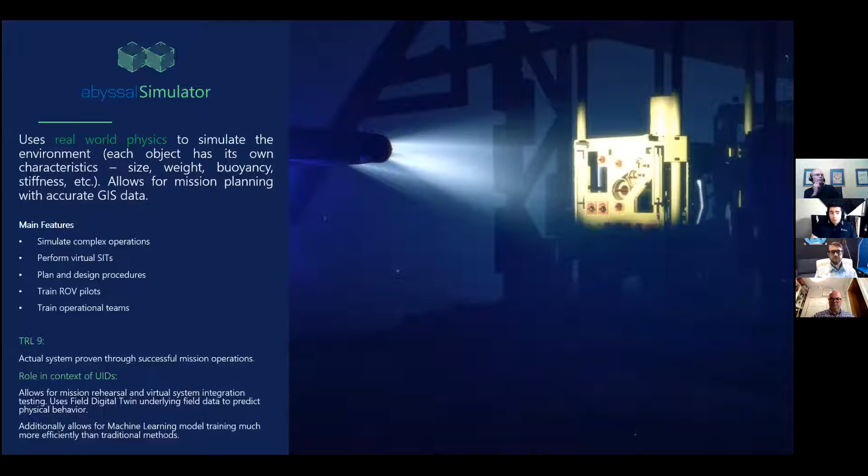Now that we have the data, we use a physics engine on top to simulate and perform different types of behavior analysis on subsea vehicles. The result from a simulation is a plan, and that plan is then executed.

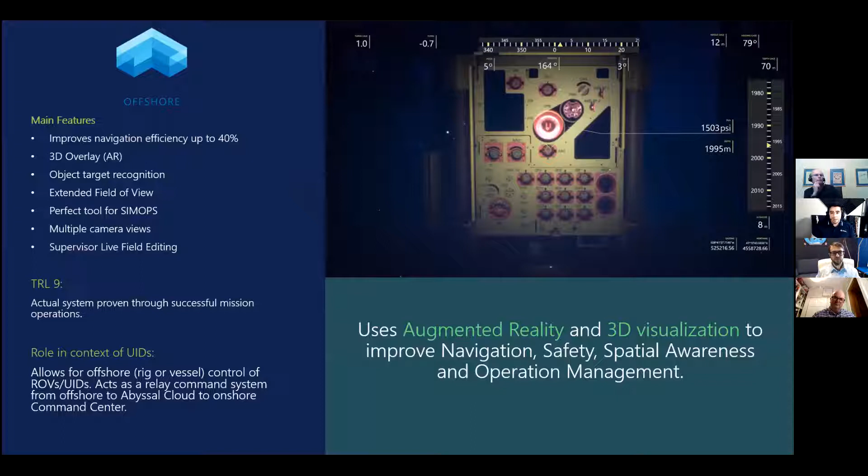The execution is essentially we have a kit that we install in the ROV control room near or on the vessel, or on an unmanned surface vessel equipped with an ROV. What it does is allow better data management locally offshore. If there's a pilot there, we also do augmented reality to help the pilot navigate better in low visibility conditions. This is an example of that augmented reality.

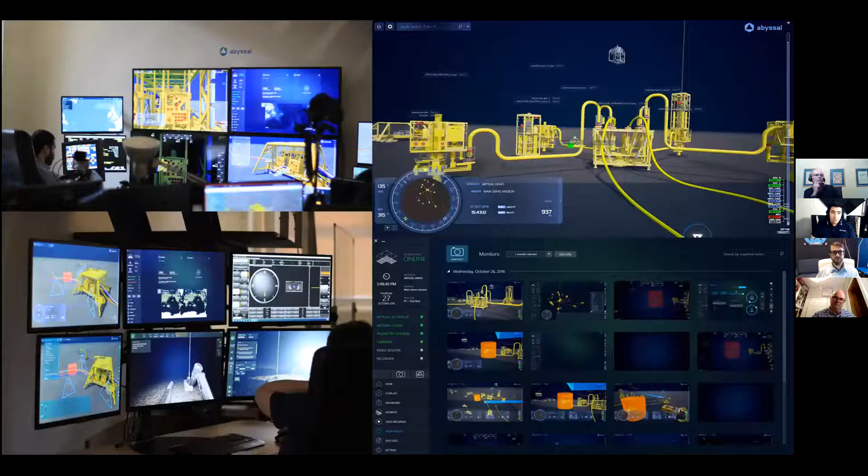Because we have access to that 3D environment and the live telemetry from the ROV, we can do things like this. This is just a couple of pictures of the system in use.

Now, while we're performing those operations, those jobs offshore, and because we're sending that information to the cloud, our capability of creating command centers on the fly is very straightforward for us to do. This is an example of what we've done, and Al was also involved in this.

This was, we were tasked with the monitoring of an operation where an unmanned surface vessel equipped with an ROV was doing an operation. So essentially what we've done, we've set up a command center in Sunbury at their headquarters for BP, and then we use the cloud to disseminate that information live to Baku and Houston, so that people could see the operation in 3D live.

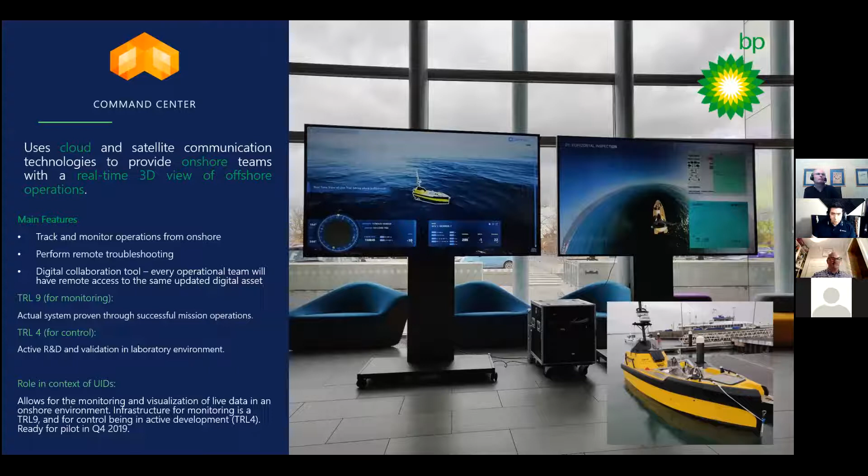So, let's dive into the process and contextualization. The purpose of this presentation is how we can accelerate the analysis of inspection videos by subject matter experts. This is all done by automatically detecting those subsea entities and anomalies, the exact job that the subject matter experts do.

And this was our motivation. The manual or human analysis is always error prone, obviously time consuming, and you have to parallelize with human resources. What we present here is a method that relies on weakly supervised deep learning models. Essentially, it is how can we train a model with little human intervention in the process of training that specific model.

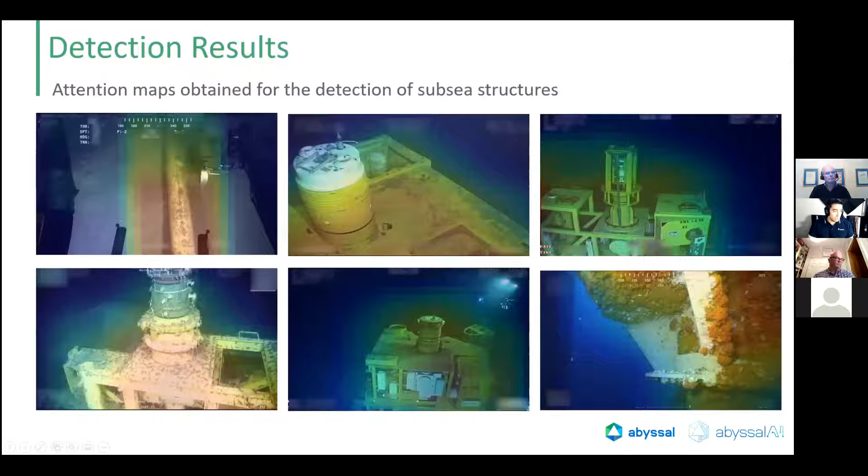But let's see detection results on this kind of imagery. These are a few of the results, from subsea entities to pipelines, marine growth in several different situations, but also to detect other things.

It's specifically useful to detect the ROV when we're talking about imagery, because we can remove the manipulator from a model, so that we don't have something in front of us. If we want to analyze only the image, we can take out the manipulator in front of the camera.

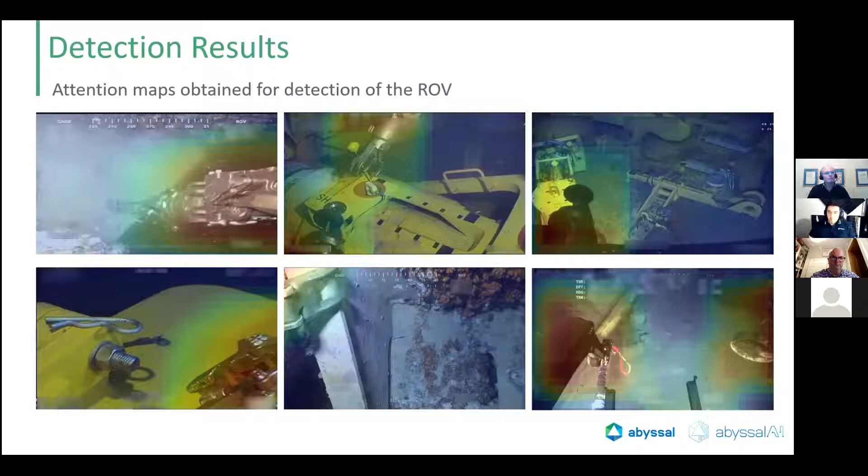But let's say that we now have a probability cloud. If we can select, instead of having a color grading, we can make it binary. Either there is or isn't marine growth in that area. We can segment, and then we can create segmentation masks, meaning that we know in the imagery where that structure is, positively or negatively. And this is going to make sense when we're moving to use cases.

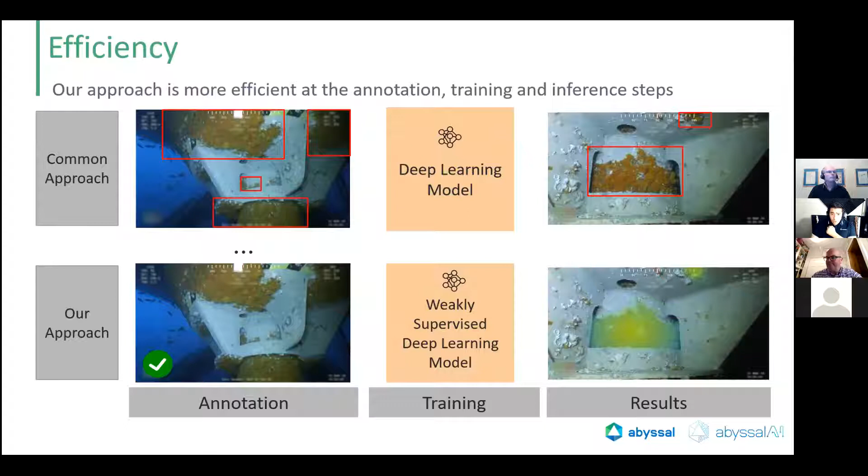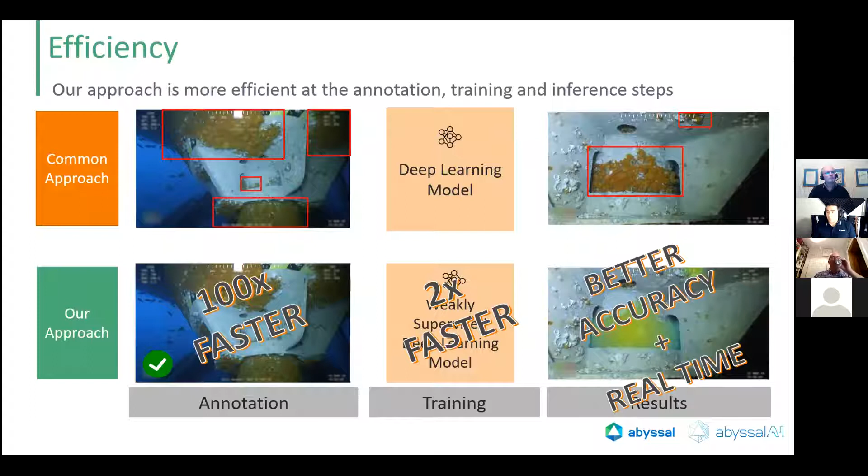But the overall result of this weakly supervised deep learning model is that not only is the annotation faster, it's 100 times faster to annotate data like this. The actual model itself is also 2 times faster than a traditional deep learning method, which means that this technique may present itself as the difference between not being able to do it in real time and being able to do it in real time. That's the benefit. But let me just put this all into context on real use cases.

So the objective with the Abyssal AI initiative is always to understand data, to reconstruct, and to contextualize. And I'll give you a few examples of how we do this. So by using the Abyssal Cloud, in which we have a huge library of videos, the first thing we do is extract metadata from video, so that we can begin to organize videos and select them more easily. So instead of training an AI model with all kinds of different imagery, we only focus on what's really important for that specific use case. And that's only achievable if we can query all the data, if we can organize it into areas of operation, into types of work.

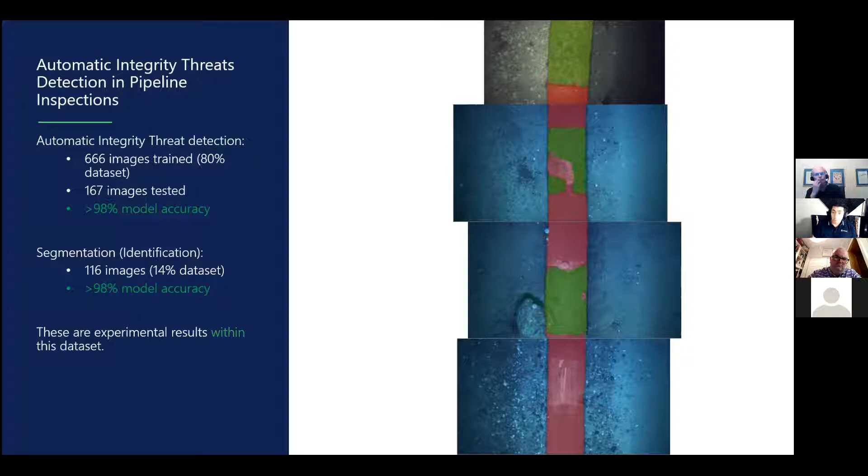Another example is the work that we've done for a client. This is the analysis of integrity threat detection in pipeline inspections. Essentially, it's the coating on a pipeline joint, and whether there is or isn't an integrity threat. But not only did we do that with 98% accuracy, we did that with very few images for training, and we could also segment where that integrity threat is. So green is where that integrity threat is.

A few other examples are how we can understand things on screen. So understand if there is a structure, if there is text. Let's take this example of text on a structure. If we can pinpoint this specific P&ID, we can trace back this image on this day with an asset integrity management service. Other examples are finding sacrificial anodes. So think about analyzing a year's worth of operations and finding out where all the sacrificial anodes are on screen and geographically, which I'll show you next.

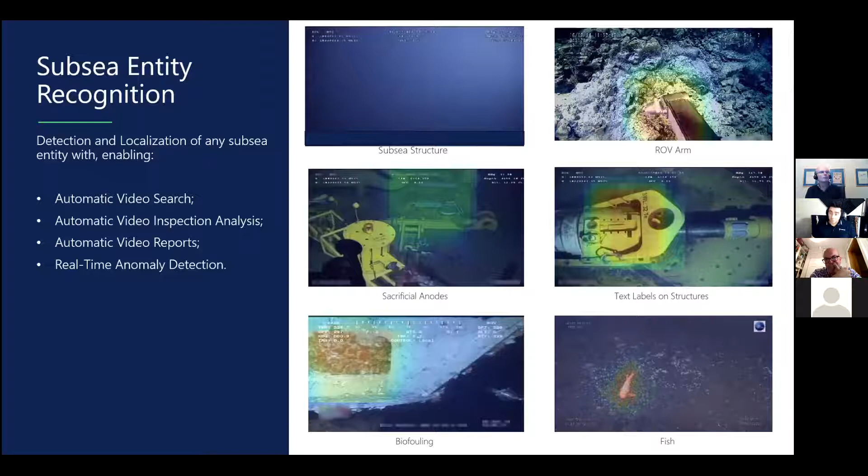But let's dive into fish. We also did work in fish classification. We trained it with so many images that the AI model began to be much better than humans in predicting fish on screen. So watch, this is a game we're gonna do with the audience. This is you against the AI, and I'll play the video. And whenever you find the fish before the AI, you'll probably win a prize, because it's going to be very difficult. So the AI will begin giving you a probability cloud on top of the video, and now it already found a fish.

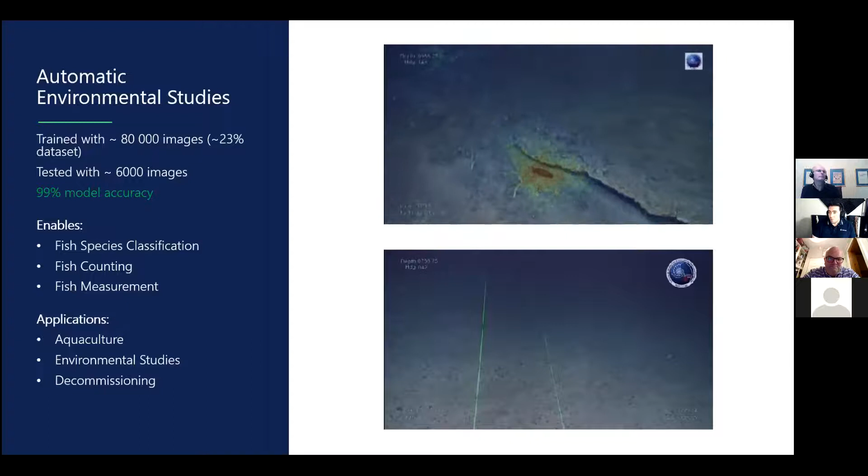And you'll begin seeing the fish there, because the AI relies on previous knowledge, and that knowledge is that there's a probability of being a fish not only because I can identify a fish on screen, but also because the area of operation, the colors, the situation are also factors in the analysis. Obviously, this is a biased use case of AI being faster. Normally, an AI will be as fast as a human in a normal case, but there are situations where it's much faster than humans.

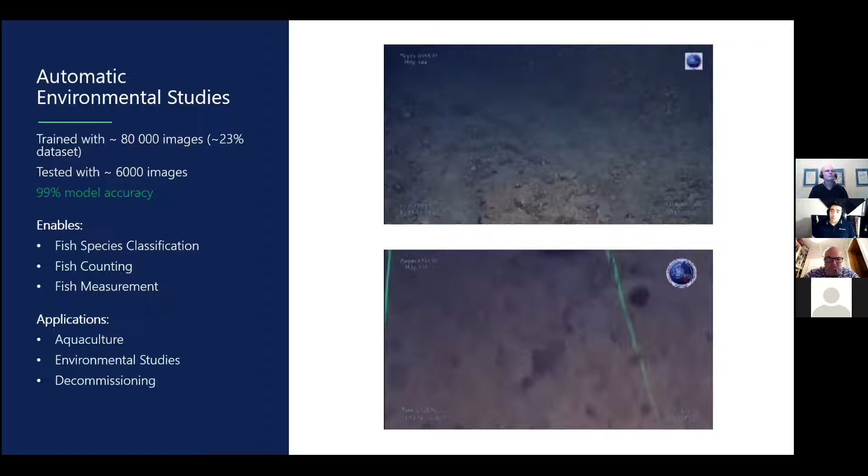And we took this problem because identifying a yellow structure on a black background is somewhat easy. Identifying fish with all different shapes and sizes and colors is an even more difficult problem to solve. So it allows us to develop the technology much better.

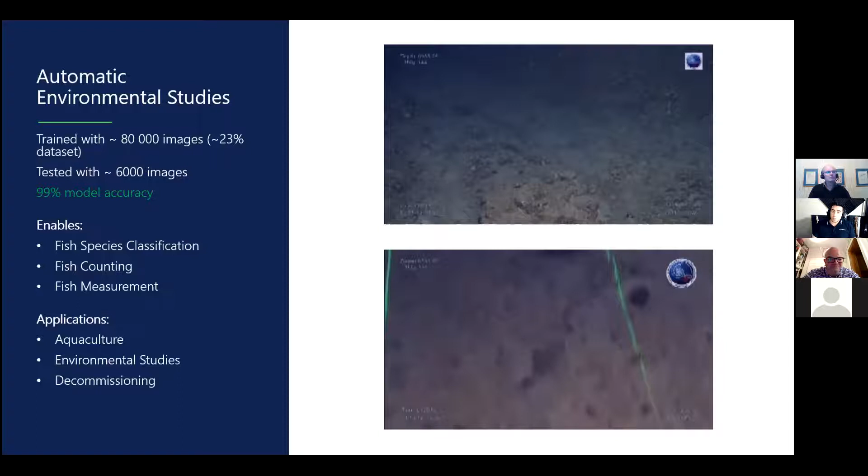And how we were able to achieve this. Let me just rephrase this. Not only were we able to identify things on screen, but we decided to be able to identify depth on screen. So having depth perception. So what we did, we used our simulator to feed an AI with synthetic imagery, the semantic segmentation, which is perfectly annotated data and automatic, so free, and provide that AI with depth perception. So that means that we are feeding an AI with synthetic imagery, which is free, no human intervention, and allowing an AI to begin reconstructing any video because it knows how to perceive depth.

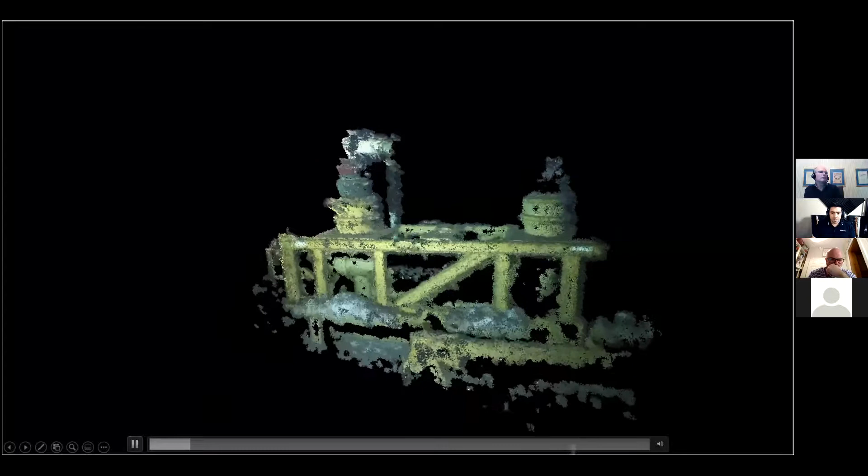So what we were able to achieve was an accuracy of half an inch. So we have half an inch of accuracy in the volumetric reconstruction, and the result from one is something like this, from a video. But this is just the result. Let's see it in a real use case.

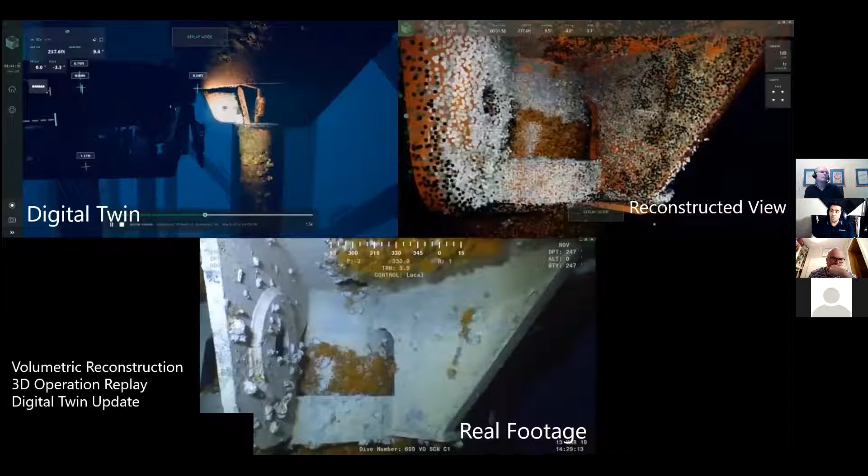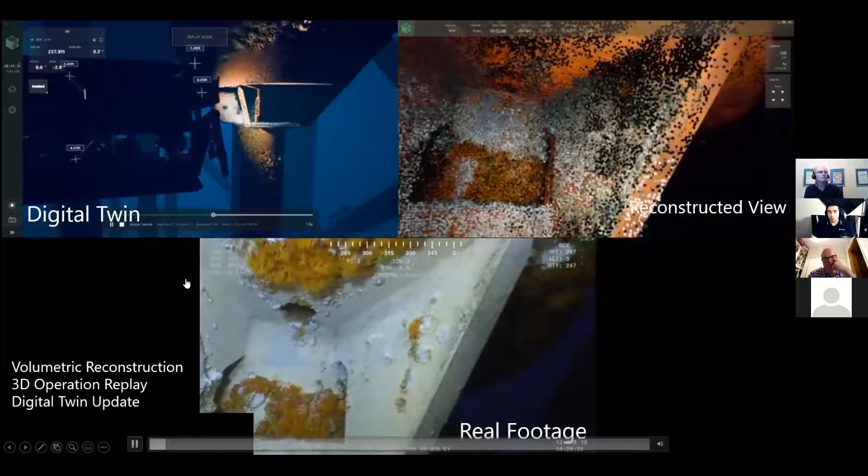This is what we've done for a client, and what we had was only this real footage. What we were able to do with this footage is to volumetrically reconstruct in a point cloud. So essentially, this is the point cloud from this imagery, and then we compare it with the CAD schematic. The difference between the point cloud and the CAD schematic is actually the marine growth, but now in a volumetric response. So now we automatically can find out the thickness of the marine growth purely based on video and CAD schematics. But not only were we able to do that, but we were also able to estimate the position of the ROV, so essentially reconstructing the operation and the movement of the ROV, but also to estimate the camera movement, which is essential to do this.

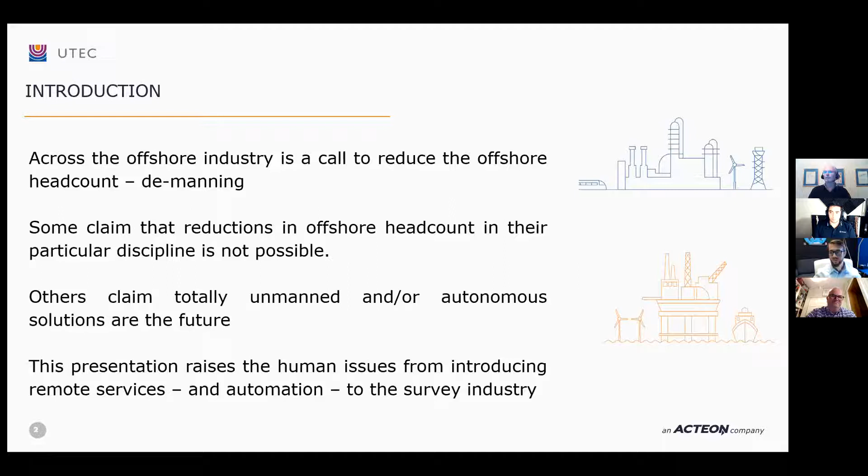All right, so it's all about demanning, reducing the offshore headcount. Right, and that's not just in survey, it's in the engine room, on the bridge, everywhere is wanting to automate and remote control. Right, and everyone sort of can go, oh, you can't do it in my particular discipline, but there's a big pressure from on high to just get remote and automation into the business.

And the arguments, it's obvious: reduced offshore headcount, fewer man movements, you can bring an expert to bear onto many spreads rather than needing an expert on each spread, and all of that's going to reduce costs. Right, so what's not to like? Well, that's what we're going to discuss.

So by removing people from the work site, one of the key things we lose is what I call situational awareness. Now this is peripheral knowledge beyond the sensor displays. It's not about giving the remote surveyor more cameras so they can see what's happening outside. It's the fact that if you move an online surveyor to a remote location, he's no longer in the mess room hearing what's gone on elsewhere or on previous shift. Right? So he just misses out on the accidental conversation. That's a big problem with remote services.

Also, if we're demanning the offshore spreads and putting people in remote control centers, operating automated software, we're dehumanizing the profession. You know, I made some of the best friends of my life working with people offshore, where you're on a big tin can for a couple of months and you get to know people, and that really strengthens networks when you come onshore later in your career.

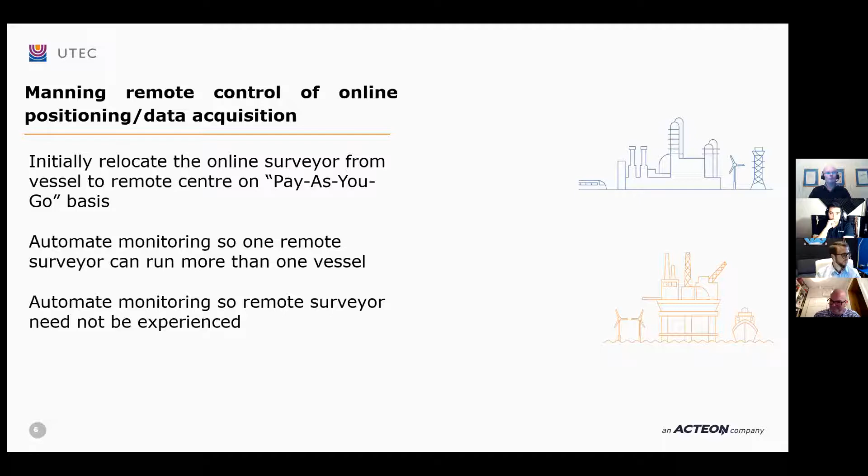Right, so never mind the online surveyor, let's look at the role of the experts. Everyone talks about remote services: your team of onshore experts supports many jobs. That's much more efficient than having an expert on each job, and also addresses the skills shortage, where all these experts come from. So you go out on a metrology and you haven't got the best metrology man because he's busy on another job. So now we can bring the best metrology man to every metrology, right? Because he's sitting on shore.

So what happens to all these other lesser experts that are no longer needed? Right? What are they going to do? If they're not getting the day's work, then they've got to retrain as something else in the survey industry, or just leave. And then you can apply the same to inspection coordinators. One coordinator could supervise multiple inspection engineers. And same with party chiefs, offshore managers, client reps.

Do they need to be on the boat? Can they just be sent all the screens and data so that they can QC and monitor from onshore? And again, you don't need a remote client rep per vessel. One client rep remotely can QC multiple vessels. So fewer people: you're decreasing the pool of personnel in the industry, which is decreasing the experience and expertise that's available.

SubC Imaging develops advanced camera and video solutions, and thanks to our focus on reliability, modular design, and dedicated after-sales service, when a customer decides to use a subsea camera, they can be confident that we are committed to your success. With years of experience in our field, we're able to easily navigate the meticulous evaluation process that businesses and researchers must adhere to when picking who to work with. Our customers do not choose their partners lightly because of the long-term equipment investment.

What is scripting? Scripting is a simple software language that, in this case, allows the solution to run autonomously. Scripting uses the SubC open source API, our scripting, which runs inside the camera, and the camera is an embedded system. The user writes scripts referencing the SubC API to complete their desired functionality. SubC has created examples of scripts which can help with advanced applications.

The API has conditional statements that allow users to execute commands based on the state of other input variables such as time or external sensors. There are also two time sources available, the built-in real-time clock and external network time protocol.

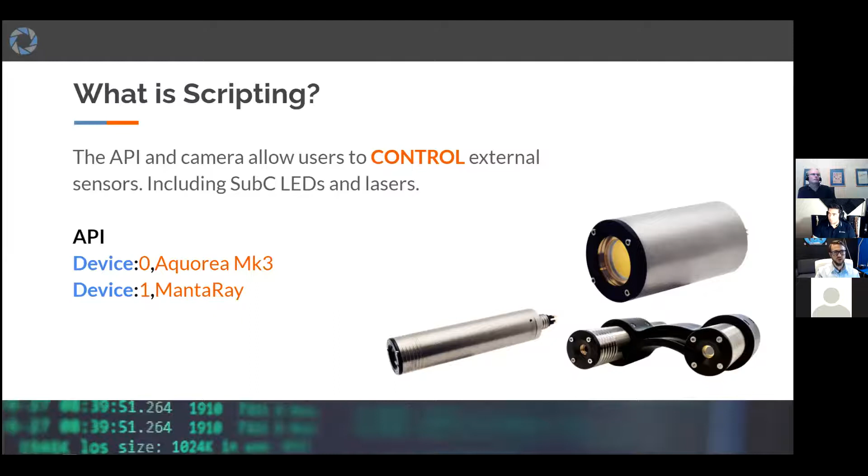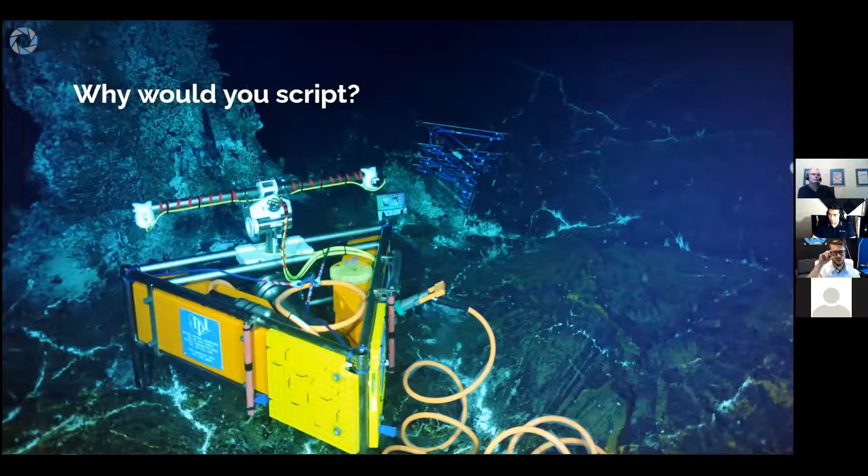Why would you script? In an application where there are periods of time where user interaction would be inefficient or isn't possible. Common applications without human interaction would be AUV, observatory, or other battery deployed scenarios where a time lapse of stills and video are required.

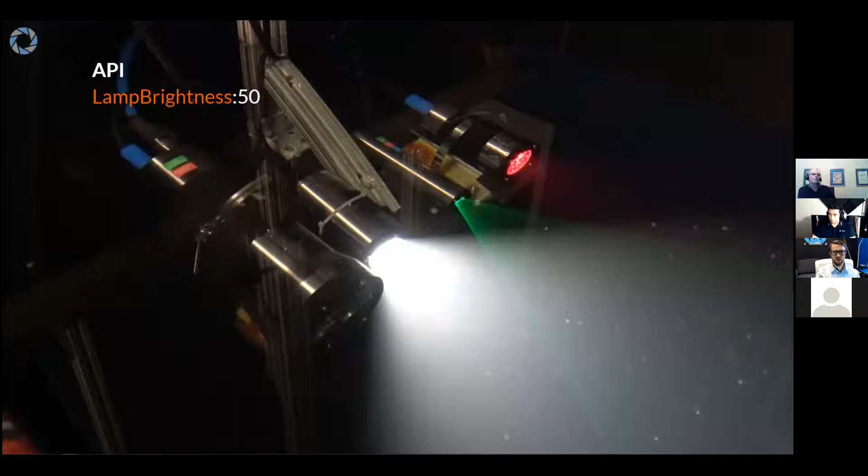SubC cameras can control white LEDs, far red, and other colors of LEDs, as well as different types of lasers. The camera supplies power and strobes the LED in sync with the sensor exposure time, which reduces equipment and interface complexity. Here's their API call for enable strobe. SubC also has a number of plug and play options for lasers.

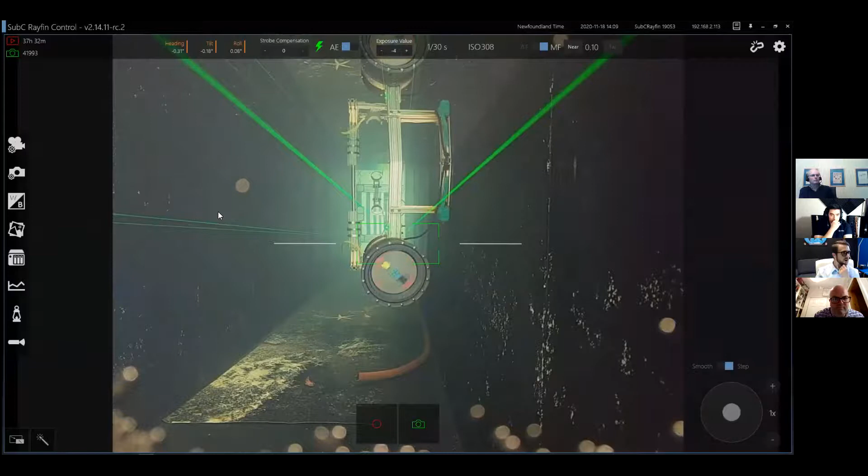Now I'll give a real-time demonstration of a camera with scripting capability. You can see the camera running here along the top.

Here we have our heading, tilt, and roll. You can also have a depth sensor integrated, strobe control to turn on and off your strobe, and exposure control so you can change your exposure bias.

For auto exposure, you can also set it to manual exposure and adjust your ISO and your shutter speed. You can also control your focus from near to far, and everything can be full auto or full manual.

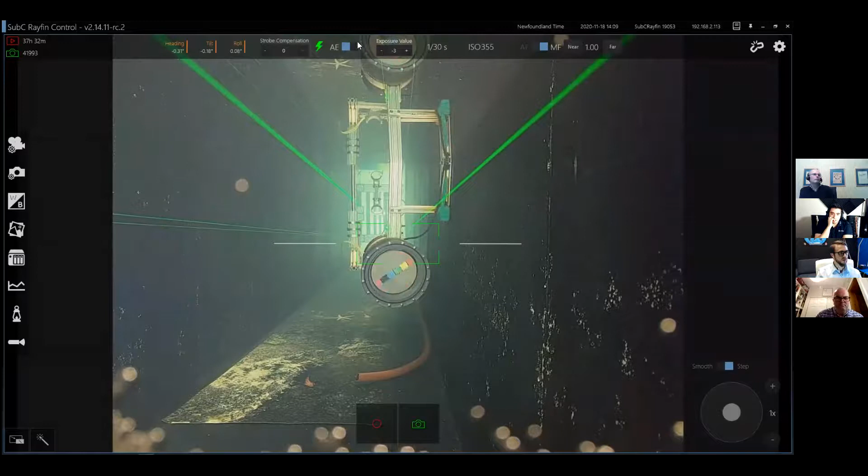Along the left, we've got some recording settings. You can have different site names, so site 1 for example, and you can have a project name or a folder or directory name, so project 2. We can also insert some tags, simple tagging structures to make things a little easier. You can get down to milliseconds with tags, and you can also have custom tagging.

Quality can be recorded from 4K to SD, and I'll go 4K. We can also record H.265, a new codec over the last number of years. H.265 is about double the quality for the equivalent bit rate, so if you're recording at 100 megabits per second in 4K or HD with H.265, you'll get better quality.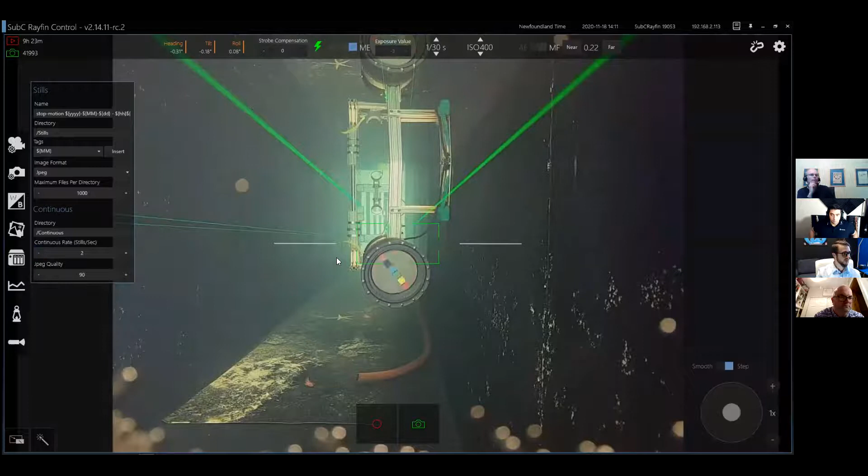Similar with digital stills, we have a folder naming convention, and file naming convention that mirrors the recording. You can change from RAW to JPEG, and you can also take digital stills continuously. If I set it to 2 Hertz and hold down the button, you can take digital stills rapidly over a wide area and use those for photogrammetry or other applications.

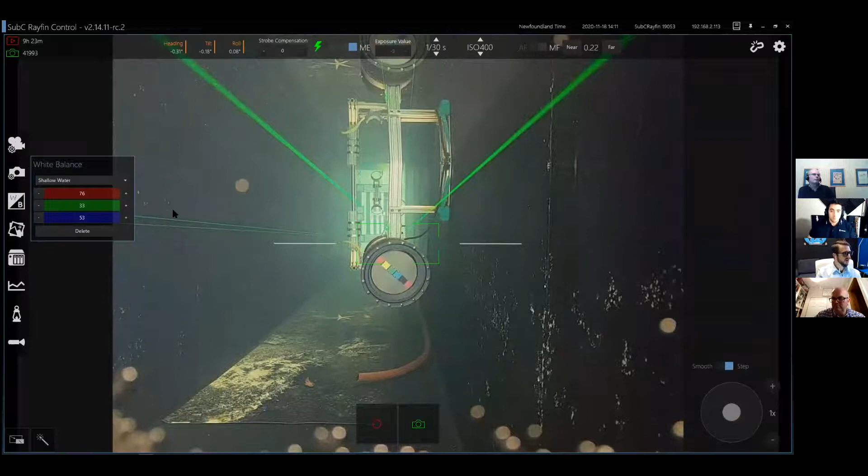You can change your white balance as well, so we can have a shallow water setting. Say if you were in shallow water and there was a lot of green, you could reduce that and adjust it for your environment to get a better image.

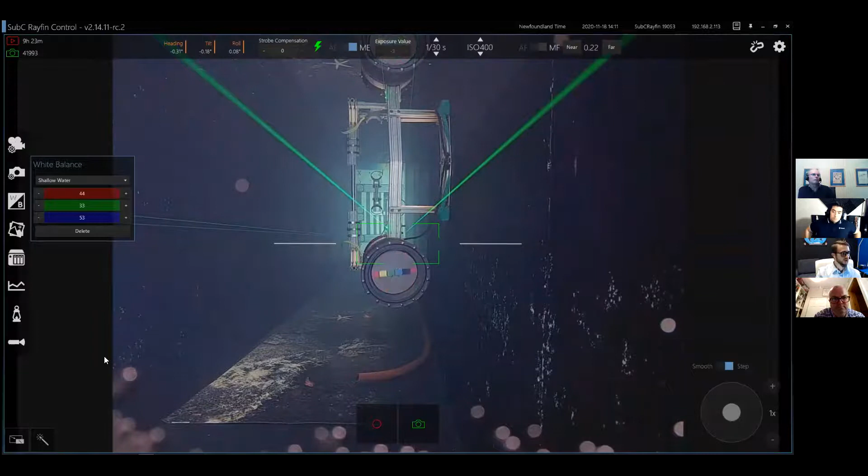Similar to that theme, there's an image enhancement built in if you really can't see anything. That's for really murky environments. This is a tool so that you can at least see something to get the job done.

You can also view our images and data in real time, and other computers and processing systems can access this data over Ethernet from the camera in real time. You can record on an observatory or an AUV with a low bandwidth connection for video, so you don't need your live 4K back. You can record to the camera or take digital stills, download those images and video in real time, process them, and get very creative with your workflows to improve efficiency.

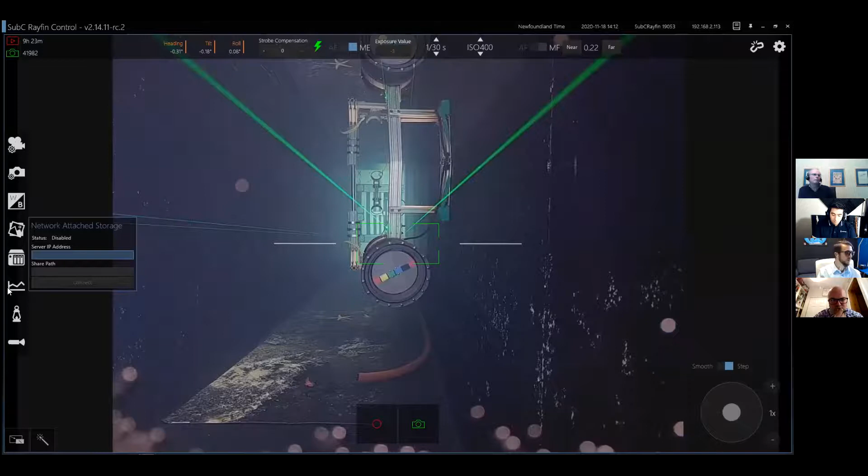NAS storage as well, so you can store to an external NAS on the network, somewhere on board the vessel. And data logging, so it's enabled right now. We can change our logging frequency, that's in Hertz, and we can start and stop.

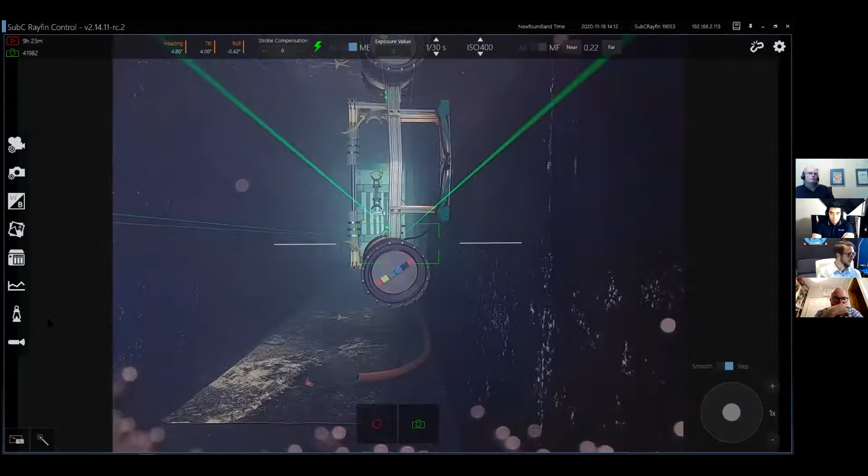We can also reset the IMU or set a new zero for the IMU, that's your heading, tilt, and roll. So I'm going to reset it. And you can control your attached lamps and lasers and other devices that you have connected.

On the right-hand side in the advanced settings is where we're going to be focusing, just some quick communication connections, settings for bit rates of the live video. Here it's important to understand your time and locale settings. Time is really important for data logging.

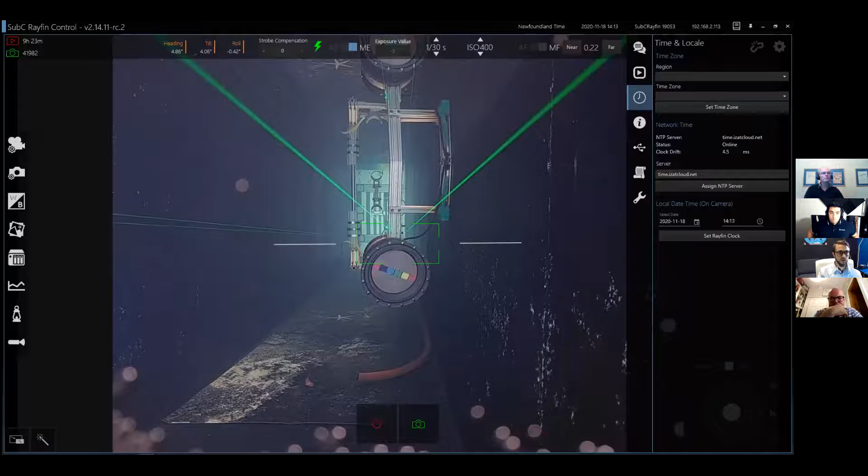So you've got your region, your time zone, it defaults to UTC, and you can also have network time. That would sync to an online cloud NTP server, one on board a vessel, or one even in the system, say in the case of an AUV. And you've got a local date and time, which the camera will default to if you lose your network time connection.

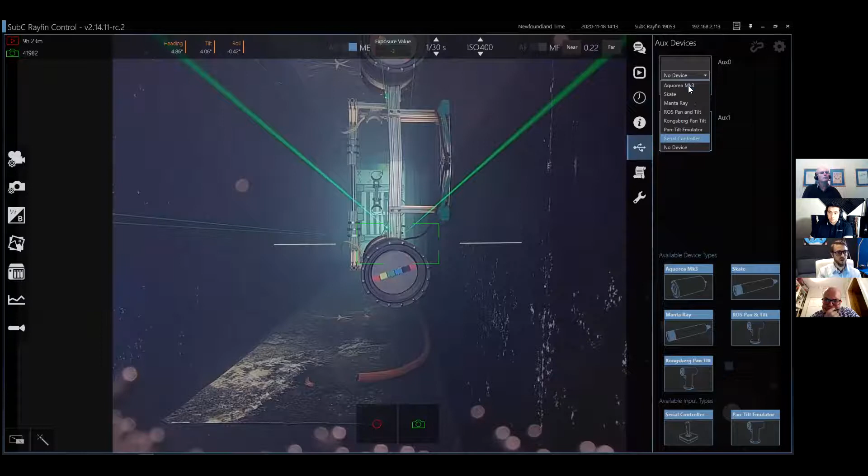Some diagnostic information. This is where you set up your plug and play auxiliary devices, so you can have a number of devices here. This is what we currently support, and we can add more over time. Right now we have an Aquorea Mark III and a Manta Ray parallel laser connected. As you add devices, the controls are accessible through the API and through the user interface here.

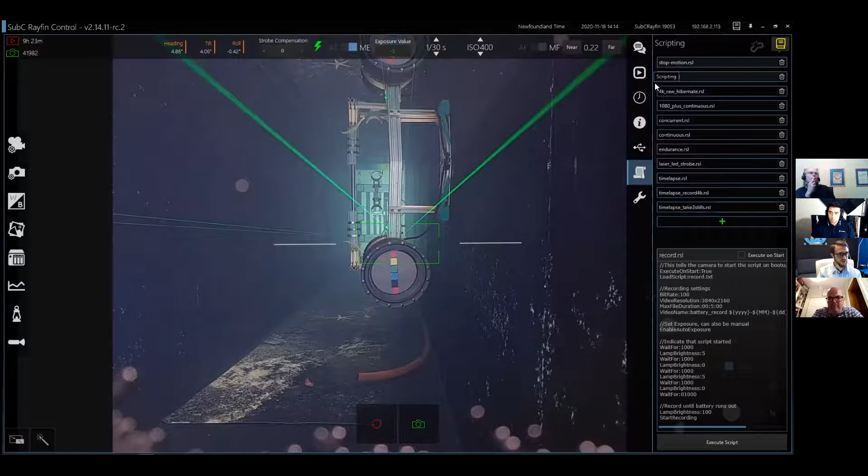This is the point of having this demo right now: scripting. So I'm going to run this script. What this will do is set up a stop motion function, changing it to raw format images, turning on auto exposure, autofocus. Should wait for 2 seconds now.

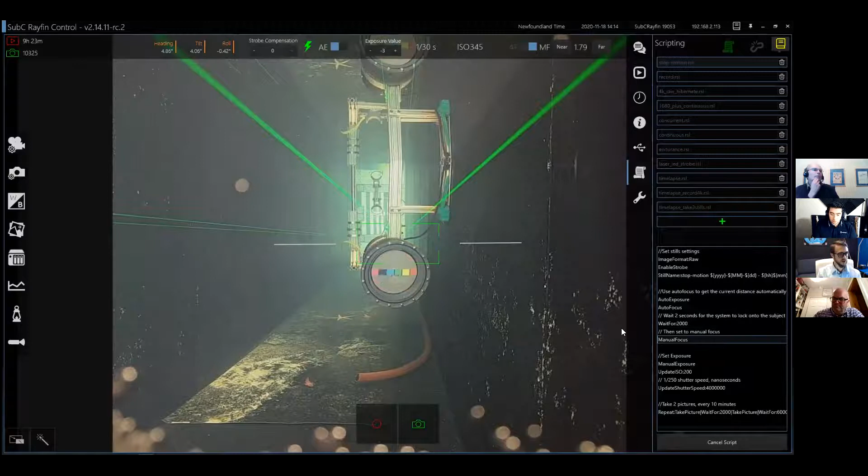And it's going to turn on manual focus to lock it in, manual exposure to set the shutter speed and the ISO. What this function will do is repeat: take a picture, wait for 2 seconds, take another picture, and then wait another 10 minutes. So that function will continue to run autonomously now.

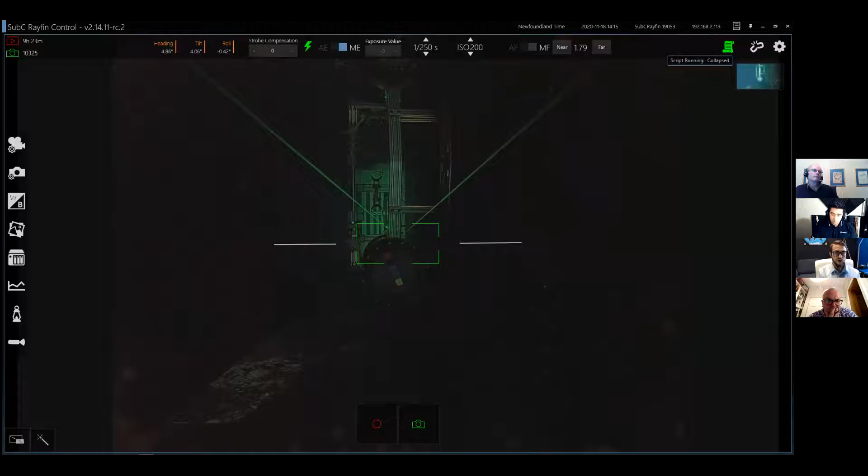You can see a script is running through the user interface. That's something to note: you do not need to use the user interface with our cameras. We have customers that are using Python scripts and other scripts, using our API, sending commands to the camera, using the camera as a sensor as part of a larger system. If you would like to cancel your script, you can just turn it off this way, and that icon disappears.

So now I'll write a quick demonstration script. We can add some comments, some notes, and I'll set it to auto exposure, video name test, and update white balance, auto, and lamp brightness 100, and start recording.

I can also have this script execute on start. So what that does is when the camera boots up, it will automatically execute that script on boot up every time the camera turns on.

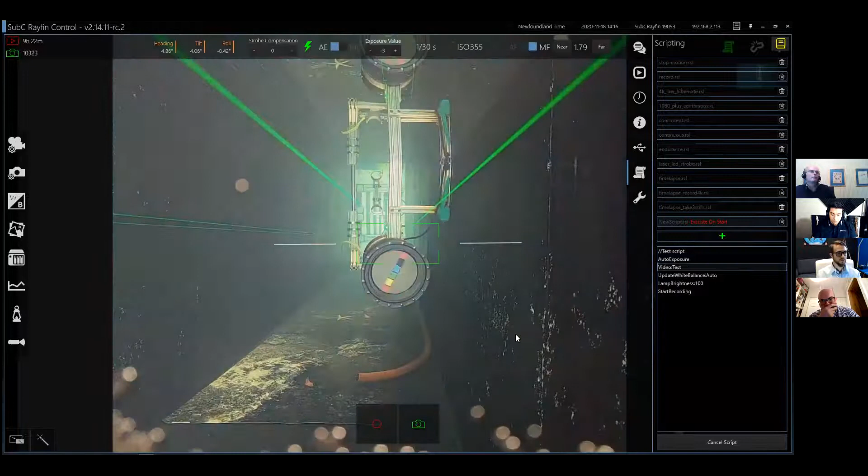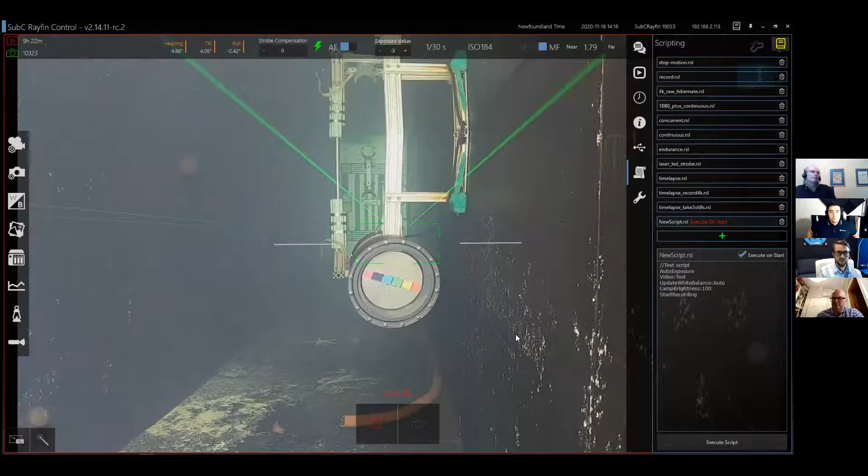And there we go. So what this means for researchers and for people in the offshore and on any underwater application where you need imaging is a lot of this stuff has to be usually designed or figured out by the researcher or by the industry person, by the professional. We are working hard to try and automate things and try to make it really easy. So that's the camera demonstration, and we go back to the presentation now.

So what are the benefits of scripting? It's reduced autonomous system complexity and cost. Scripting allows the camera to operate independently without requiring an additional computer or person to send commands on a schedule. For example, in an observatory, there would be a dedicated server running Python scripts or other scripts to directly control the camera node and the other sensor nodes.

Normally, underwater imaging solutions would require a separate data logger. In our case, the camera is a NMEA data logger, so that reduces equipment. The camera has 512 gigabytes of solid state storage and records weeks of NMEA formatted data, days of video, and tens of thousands of images.

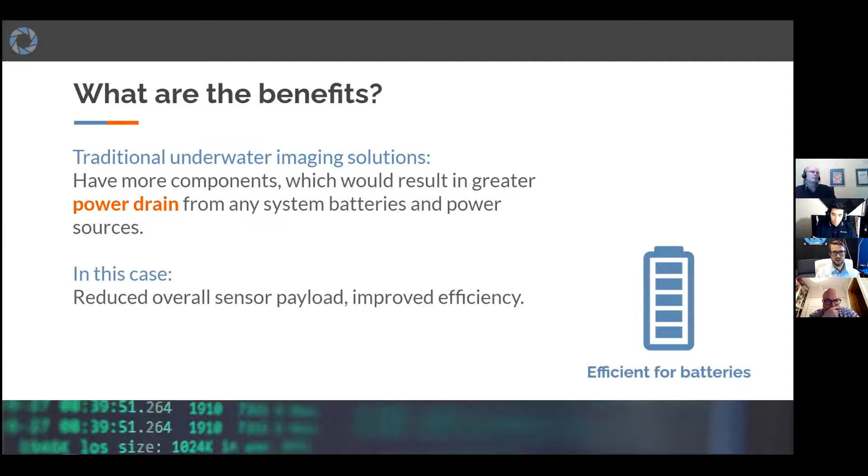Each additional piece of underwater equipment would require its own pressure housing and cable. So by reducing components such as data loggers and controlling systems, you reduce the cost and you increase the reliability. And when a system also has less components, you would also expect it to consume less power from battery systems.

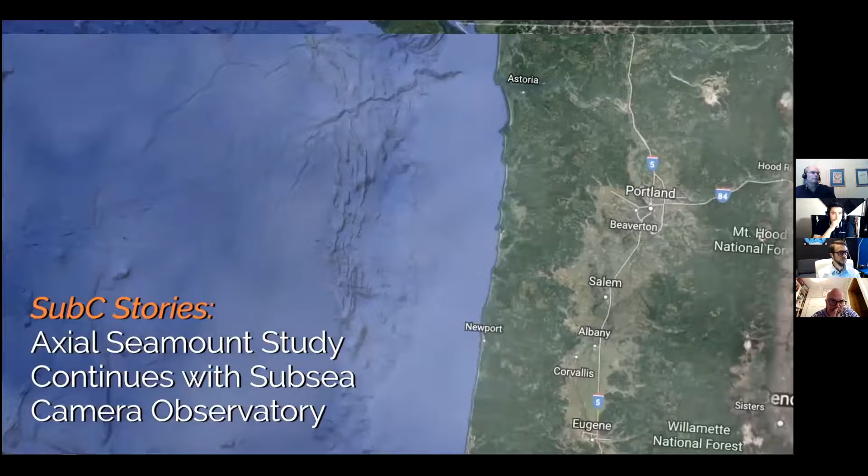So I'm just going to show you a few real world examples. SubC has been working with the OOI, Ocean Observatories Initiative in Washington State for a long time now. So this is a video at the Axial Seamount. It's several hundred kilometers off of Oregon. They've been using our cameras for a long-term time lapse of images and video of a hydrothermal vent.

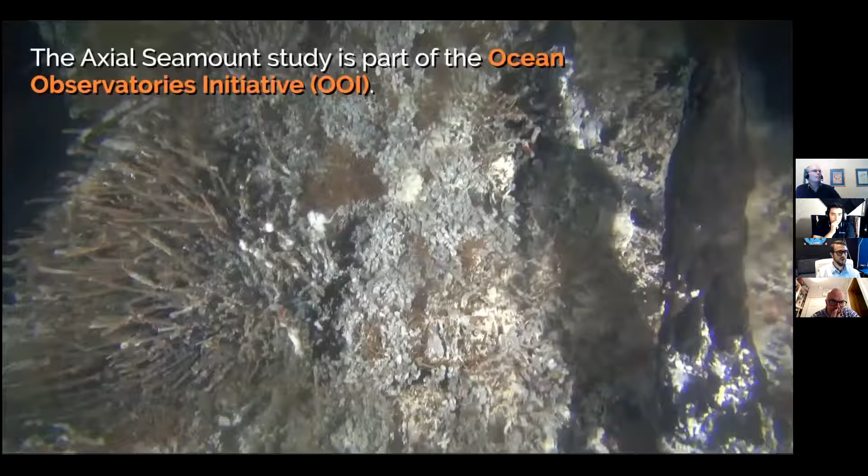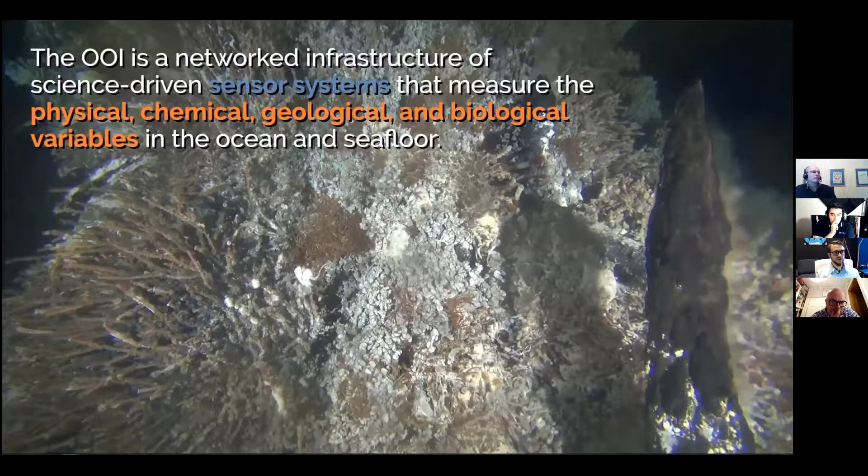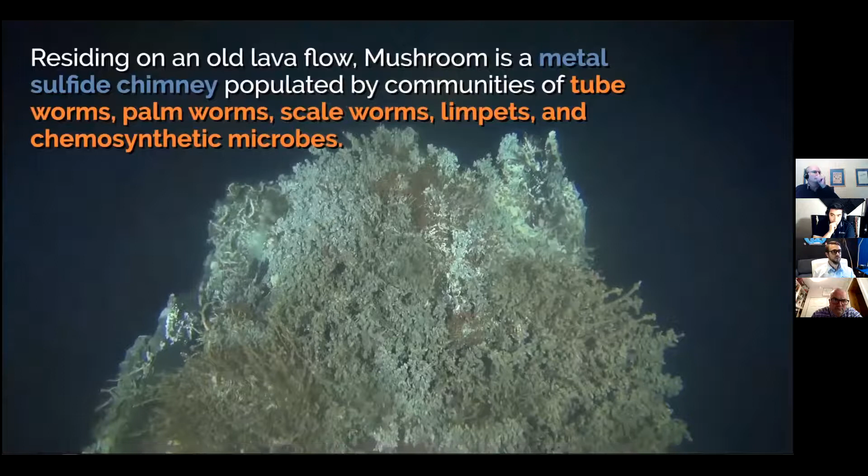The OOI is a very large networked infrastructure of hundreds of different sensors at different sensor nodes. They're all connected with a large fiber optic network back to a giant server station at the University of Washington's Applied Physics Laboratory. This particular hydrothermal vent has been studied since 2014 with subsea cameras.

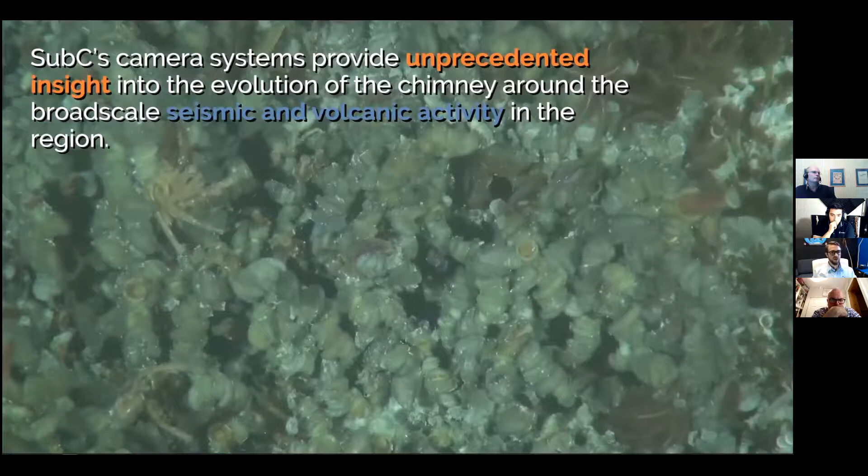It's called the Mushroom, and the hot spring fluids can reach very high temperatures. The creatures that reside there, living on this structure, shift and change over time. Different populations go up and down as time goes forward, and the vent structure itself changes shape as well. So it's a very interesting study over a very long duration.

So if you'd like to know more about that, you can see more on our site or on the OOI site.

One second. Okay. There we go. Okay, trying to figure out how to use these slides.

All right, so this option was developed with the Ocean Observatories Initiative on the West Coast of the United States. It turns the camera into an Ethernet multiplexer for 4 devices with a resettable circuit breaker and fault detection. So this is another piece of automation. Essentially, it reduced the need for having a separate Ethernet switch with relays and fault detection, and we moved everything into the camera so that the camera was the hub, and we could automatically detect faults from under voltage, over voltage, or short circuit from other equipment.

So we had a pan tilt, 2 LEDs, and a set of parallel lasers all running from the camera, and the camera was the hub for that. And everything was accessible through the API for scripting.

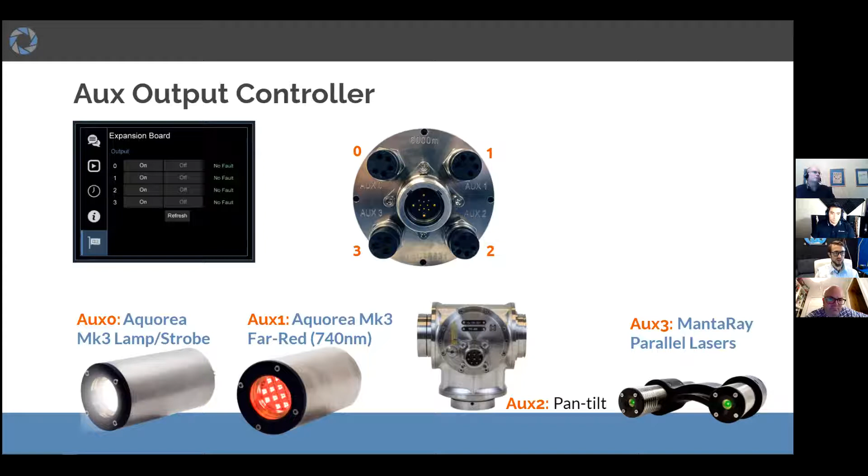The Marine Institute in Newfoundland has been using subsea cameras with scripting and intervalometer for many scientific studies. Their system runs on batteries and is attached to a lift wire. The systems are deployed between 100 meters to 3,000 meters on these lift wires, and it's all autonomous. So the cameras are programmed before deployment on the deck of the ships.

The operator doesn't have a real-time view of the footage, and it goes along and it hits rocks and does other things, but it's quite robust because it's a heavy steel frame running on batteries. The system is used in fishery studies to add data for stock assessments. In this set of clips, the Marine Institute was conducting a turbot fish study. So the same deployment methods have also been used to study Greenland sharks and other species.

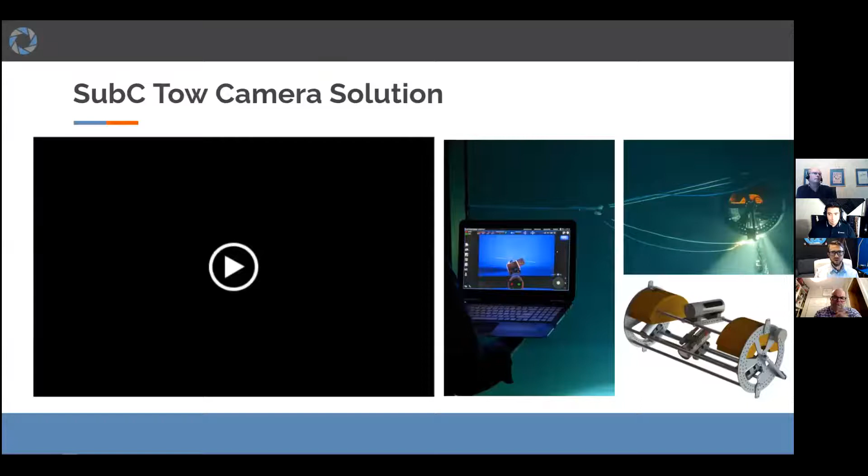Here you can see SubC's new towed camera solution being tested in the world's largest flume tank at the Marine Institute in Newfoundland. You can see a digital still script running as the LED strobes in sync with the Rayfin camera. You'll notice the green dots on the bottom of the tank as the MantaRay parallel lasers are activated. The dots are calibrated at 10 centimeter spacing and can be used for scale and range.

With this system, a live view is available, so scripting is not 100% necessary, but it's definitely useful for automation. So an example of this would be if you wanted the system to automatically start recording at a certain depth, you could do that, and that takes some of the guesswork out of it.

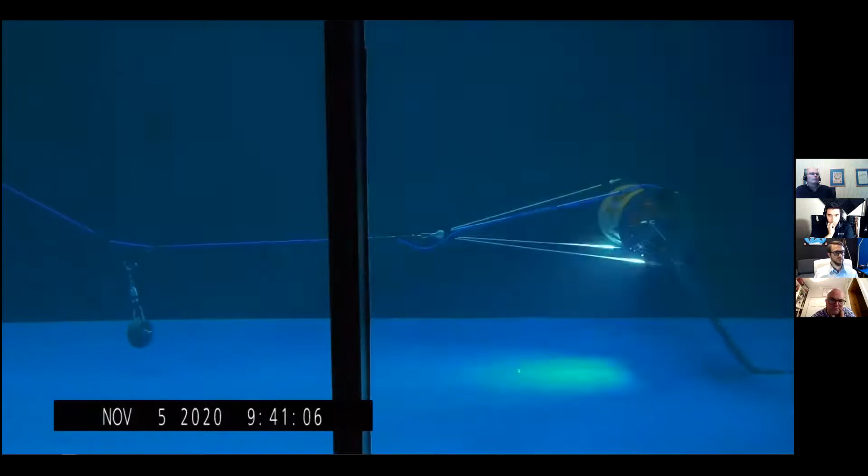University of Victoria has been using SubC's observatory solution for their underwater study in Barkley Canyon since 2014. And in May 2014, 3 humpback whale rib sections, 1 block of Douglas fir, and a block of authigenic carbonate were placed at a depth of 890 meters inside Barkley Canyon at a site on Ocean Networks Canada's Neptune Subsea Camera Observatory. The purpose of this experiment is to monitor the changes triggered by the implantation of various organic and inorganic substrates, as well as to monitor how benthic creatures utilize the sparse food resources available in deep sea settings.

So on a schedule of every 2 hours, the autonomous subsea cameras and the LEDs panned to 3 different substrates while holding position for 1 minute each, and they captured 5-minute videos over 6 years. And the study is still continuing today. So it's a small kind of hotbed of activity for creatures because the abyssal plain is pretty sparse. So this site kind of attracts species from a wide area.

In the webinar theme of remote operation and the new normal, we thought it would be relevant to give a quick overview of the new SubC real-time streaming service as well. It enables remote operation of assets. So kind of counter to our previous trend. We are enabling that. Our hands are off from there. We're enabling the service. We don't decide whether you want to use it.